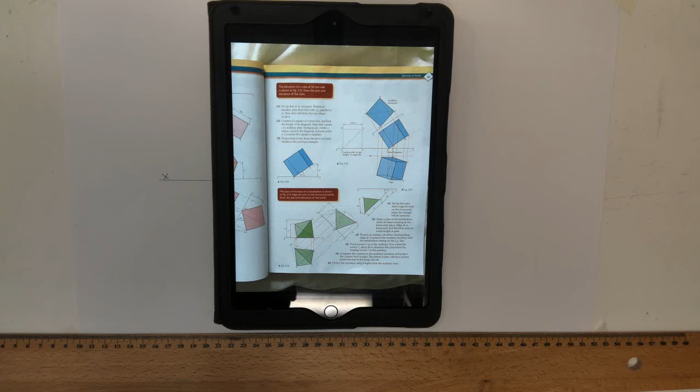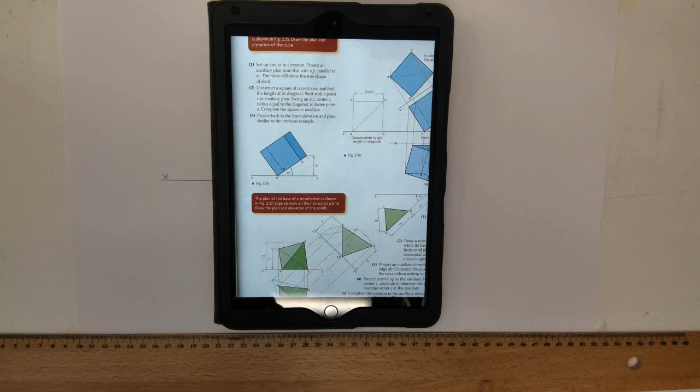Right lads, in this video I'm going to go through the question on page 35 for the tetrahedron. It tells us the plan of the base of a tetrahedron is shown in figure 2.37. It's just this picture over here. Edge AB rests on the horizontal plane. So this edge here rests on the horizontal plane, therefore it's going to be a true length. Draw the plan and elevation of the solids.

So I have the question set up here already, showing AB, and then I'm told that the other point on the base is 60 mil away from corner A. So what I need to do is take 60 mil on my compass and swing an arc.

So I've been given no other distance, but I know if edge AB rests on the horizontal plane like this here, and it's a tetrahedron sitting on the ground, all sides are going to be 75 mil, as the length of AB is 75. But because the tetrahedron is tilting upwards, the shape now turns into an isosceles triangle. So the further up I tilt this, these two sides get shorter and shorter. The base stays the same length at all times.

I'm told it's going to be 60 mil. So you can see there, just where that point hits there, this length here appears as 60 mil now as well, turning the equilateral triangle into an isosceles triangle. So I can swing 60 there too, turn the equilateral triangle into an isosceles, as the tetrahedron has been raised above the ground, basically hinged off side AB. So that's the plan view I now have.

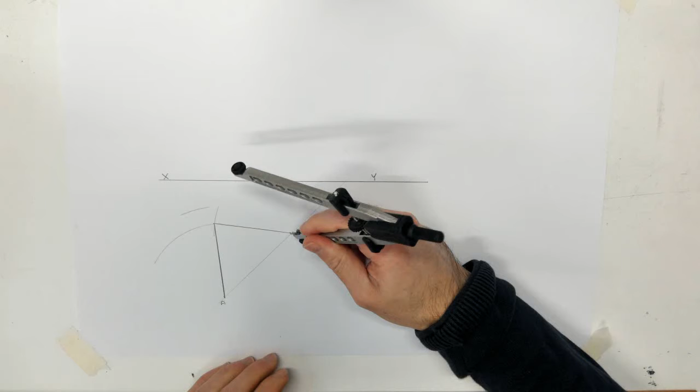In order for me to actually see what the plan looks like when it's actually tilted up, I'm going to put the tetrahedron on the ground first. So basically, I'm sitting in this sort of position here to put it flat on the ground. So I want to make sure I hinge that right down onto the ground. So if it's sitting flat on the ground, all sides are going to be 75 mil because the tetrahedron is made up of equilateral triangles. So I take my 75 and I swing it there and there. I can connect those together.

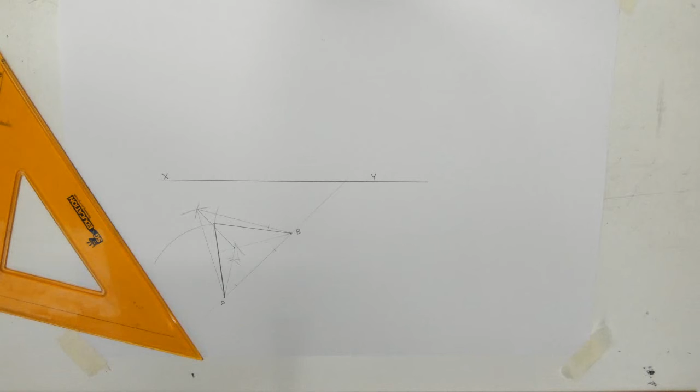And as always, when we're drawing the base of our tetrahedron, our plan view looking directly down, we bisect our angles, all these three here, to find our apex, our top point. So I'm just going to bisect the ones at corners A and B. And where these lines meet, they give me the top of my tetrahedron when it's resting on the ground, not when it's tilted up. So this is flat on the ground now.

So what I want to do is take an edge view now to see it. So if I look along the line AB there, I'll see it as a point. That'll give me an edge view of this surface here, and I'll be able to get the height of it then as a result, and that will help me with my elevation later on. So what I do is extend my line AB and my other base point here, and my top as well, and I draw my new XY line up here. We call it X1, Y1.

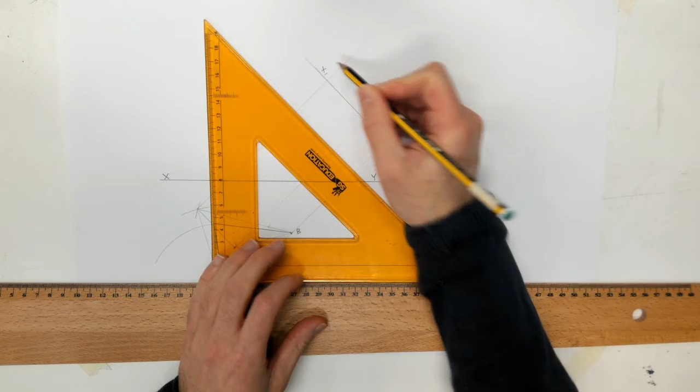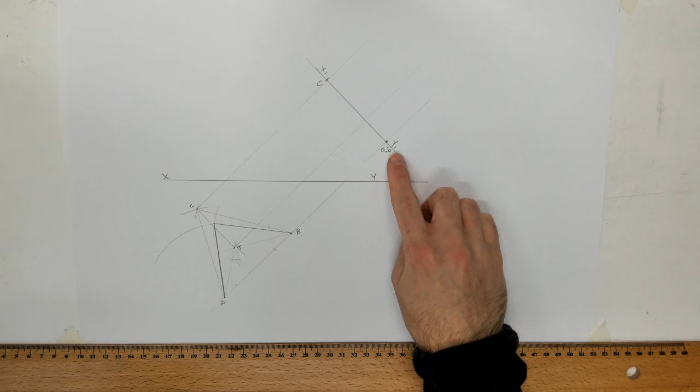As we know, all sides are 75 mil. There's edge AB. We call that corner C there. We'll just call that T for top. So C is also going to be on the ground here. And find the top point. All sides are always going to be 75 mil. So if I look along this line here, I see AB as a point, and a line drawn perpendicular to that. So remember, a line parallel to the XY line is a true length in elevation. I can take that 75, I can swing an arc there, and I just extend this point up here, give me T for the top.

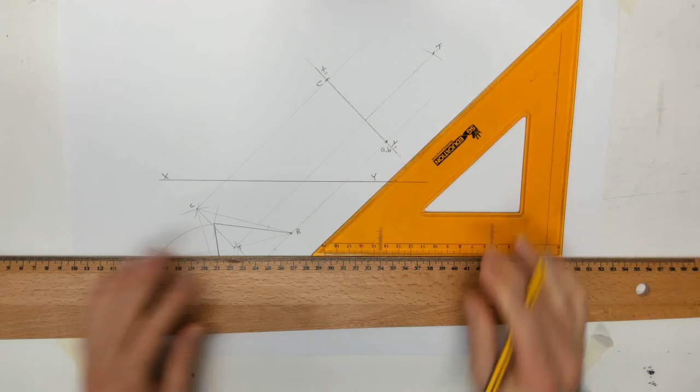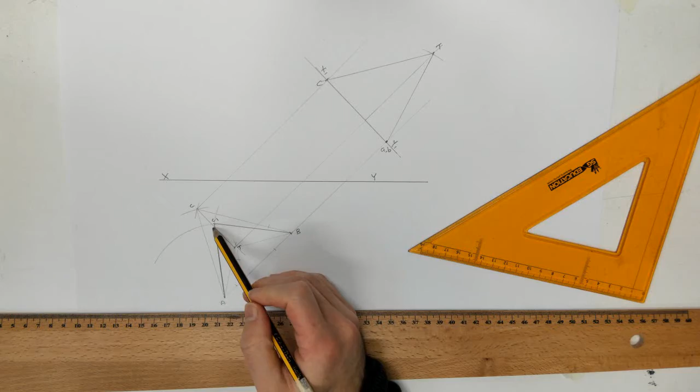Now I can draw in what my tetrahedron looks like as an auxiliary elevation looking in this way. What we're told is it's tilted upwards. So this point here, we'll call that C1. That's been tilted up from C to C1, so I need to take this up here. It's all been rotated around AB, AB being the hinge points. So what I do is I rotate C around, and that gives us the new position of C there. Call that C1. That connects back to AB, and now we rotate top.

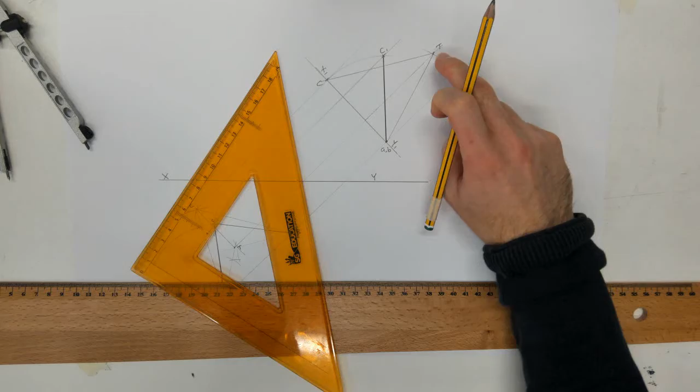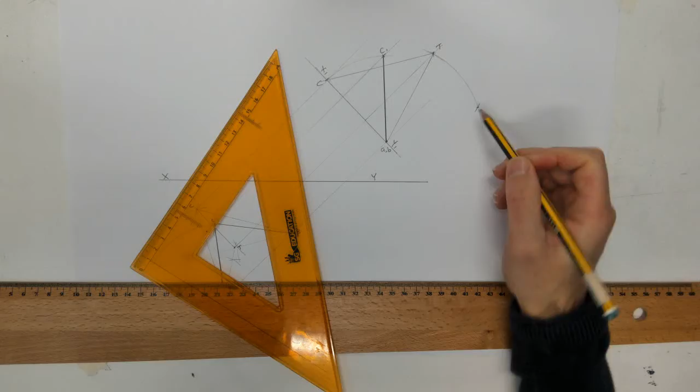T is obviously going to rotate as well. So I rotate T around there, and I can very simply take that distance from C to T and swing it from C1 to find its new position out here, because that distance there is the exact same as that distance there, and that's our new position for T. That now shows us our tetrahedron when it's rotated upwards.

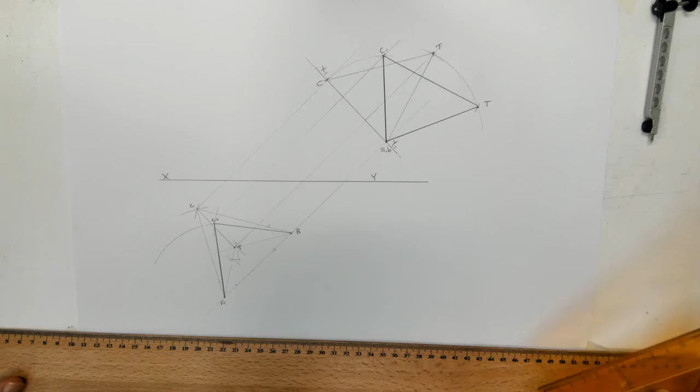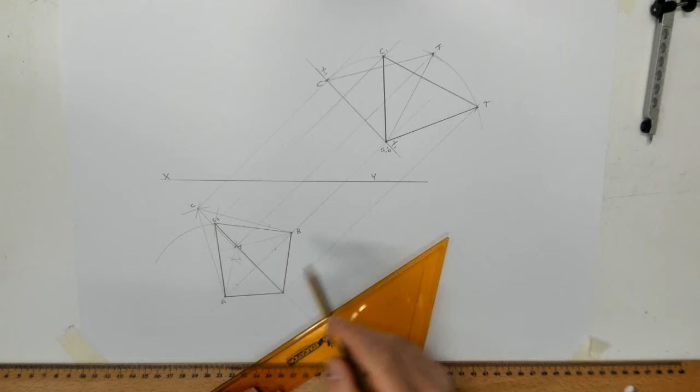And you can see now C1 goes back to its correct position there, and now we can take T back. T will stay along that line there. The new position of T, take it out, gives us that point there. And we can now connect these together, drawing our tetrahedron. And if we look down directly on top of it, we can't see AB, it's hidden. So AB now appears as the dashed line there.

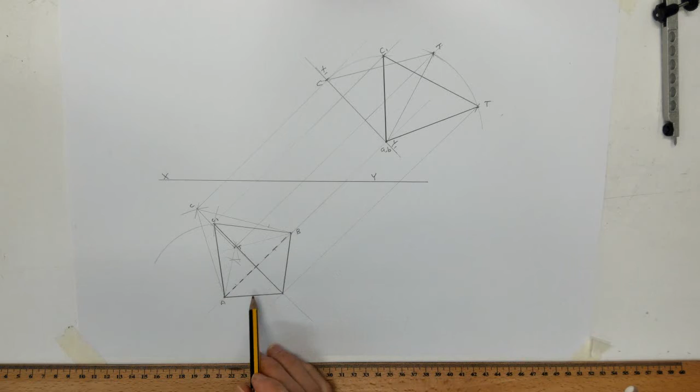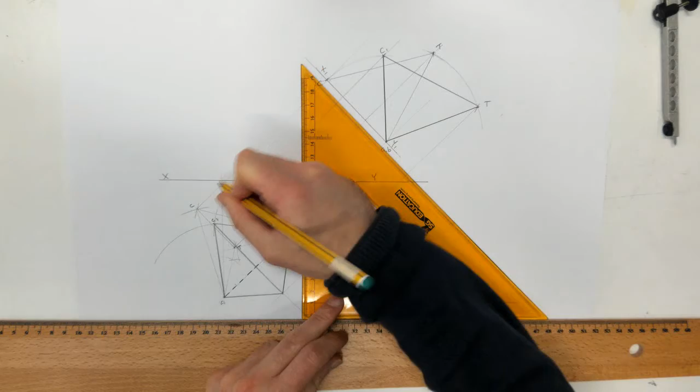And now we have our plan view of our tetrahedron. So we can see one side here, we can see the second side here, the third is on the back there, and the fourth is the base. All we have to do now simply is take our points up into our elevation. So AB rests on the ground, we take AB up there, A there, B there.

C, which was originally on the ground here, has now been rotated up to that height. So I take the new position of C here, take the height of it, mark it off there. So A, B, C are all now drawn.

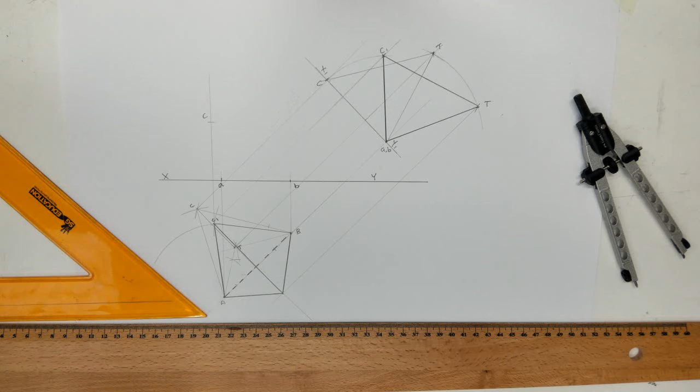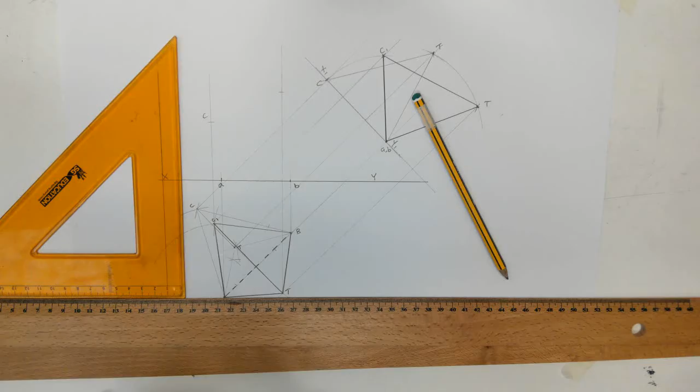And the next one we need to take is my height for this point here for T. Take that height there. There's my new position of T. Take that up as well. I can mark that there too. And now you just connect all the points together. So you can see A connects to C, C connects to B, B to T, T to A.

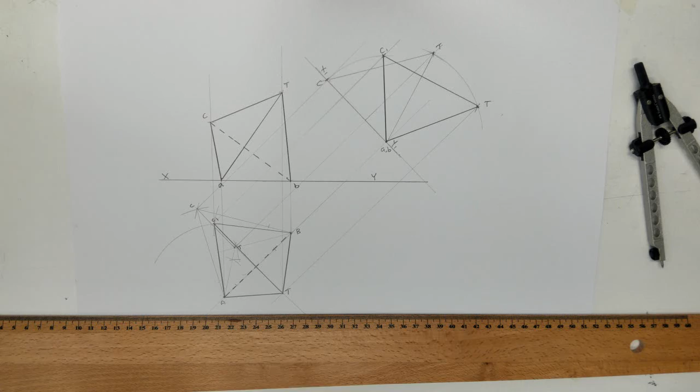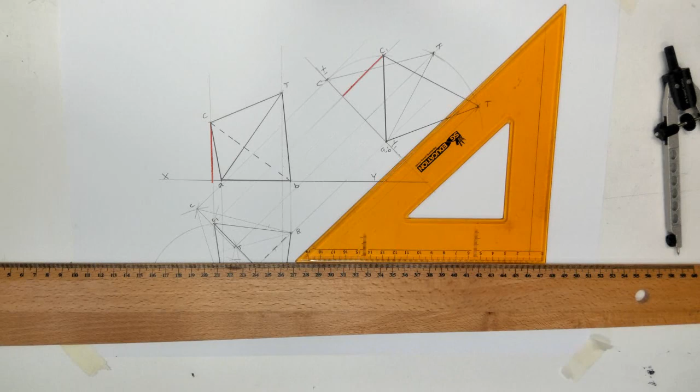That's our elevation drawn there, where the tetrahedron is tilted upwards into position. Just to show colour for some of my points, just take red there. This height here, I got from here. And just some blue for another one. I took my height here. And like that there. So hopefully that video helps anybody who might have been stuck on that question.